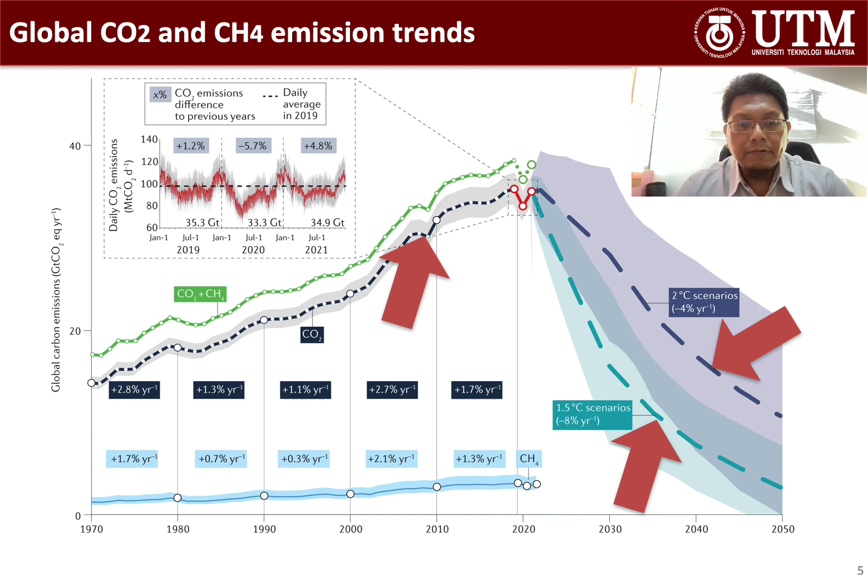This graph is showing the global carbon emissions since 1970 and the expected control level up to 2050. This is the line of the set target for decarbonization until 2050, while this is the line showing the increment of carbon dioxide emissions from 1970 until 2021. This line is for a 2 degrees Celsius global temperature increase. Both lines seem difficult to achieve with current progress.

Since the Paris Agreement in 2015, in order to meet the set target, many automotive industry players started to replace their internal combustion engine powertrains with alternative powertrains, mainly battery electric powertrains. Tremendous effort has been made to increase the global electric vehicle share in the market. In 2022, electric vehicles already covered 13% of global passenger vehicles.

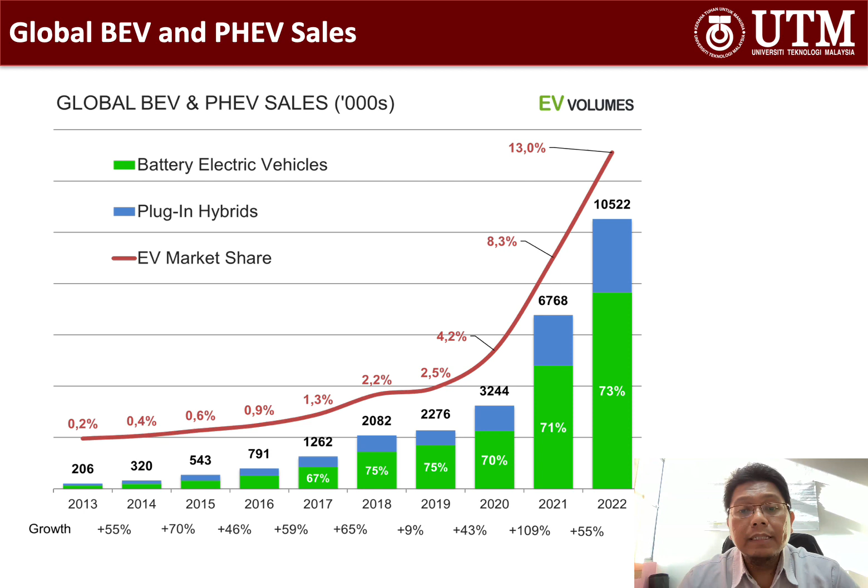However, battery electric vehicles do not always produce zero carbon dioxide emissions. It depends on the source of the electricity supplied to the electric vehicle. If the battery electric vehicle is charged with electricity produced from fully renewable sources, the carbon dioxide emissions from this battery electric vehicle can be zero. Unfortunately, many countries in the world are still heavily dependent on carbon-based fuel to produce electricity.

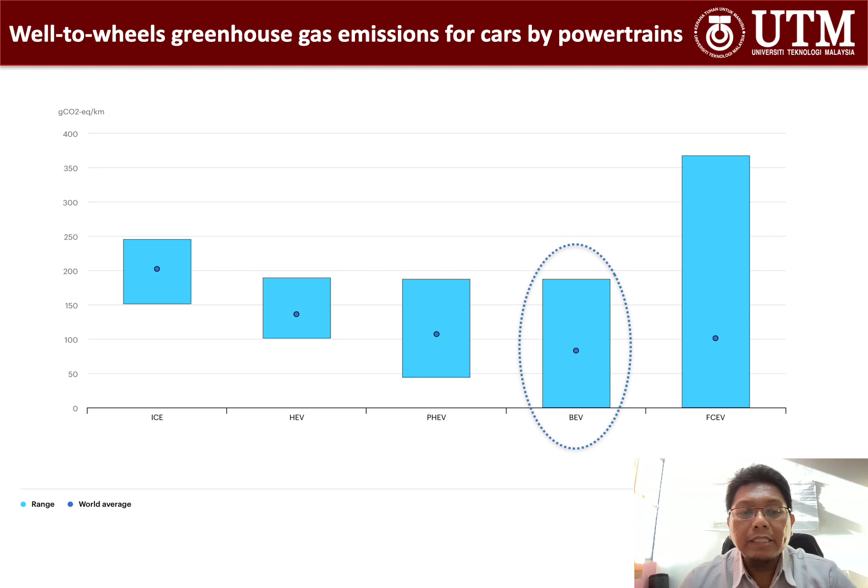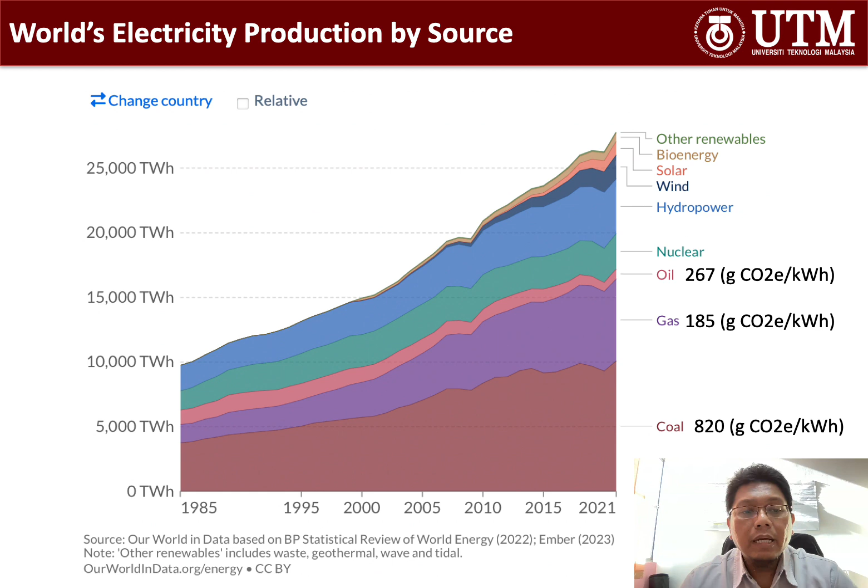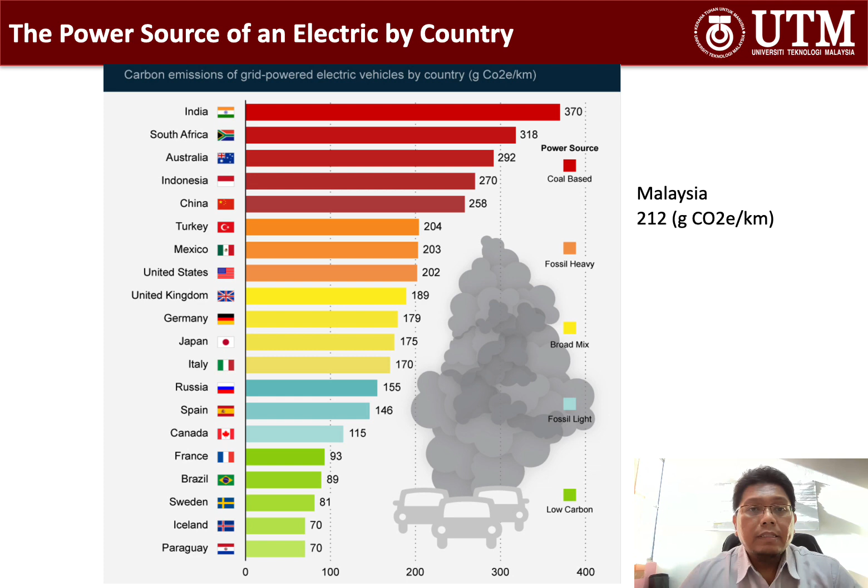As for Malaysia, the average carbon dioxide emissions if I drive a fully electric vehicle here is about 212 grams carbon dioxide equivalent per kilometer. Of course, the type and size of battery electric vehicle will churn out different levels of carbon dioxide emissions.

As an example, if you drive a Tesla Model 3 in Malaysia, you are going to produce a lower level of carbon dioxide emissions as compared to if you are driving a Tesla Model X, which is an SUV. However, we can average it into a single number of carbon dioxide emissions of a medium-sized electric car for the electricity mix of a particular country. For Malaysia, it is about 212.4 gram carbon dioxide equivalent per kilometer.

An interesting point I would like to make here is that a certain small internal combustion engine vehicle can even have lower carbon dioxide emissions as compared with a battery electric vehicle. In general, any petrol-powered vehicle which attains a fuel economy greater than 15.5 km per liter is cleaner than the average electric vehicle operated in Malaysia. Many existing internal combustion engine vehicles and hybrid electric vehicles are capable of routinely exceeding this figure. This happens because the electricity produced in Malaysia is still producing a high level of carbon dioxide emissions.

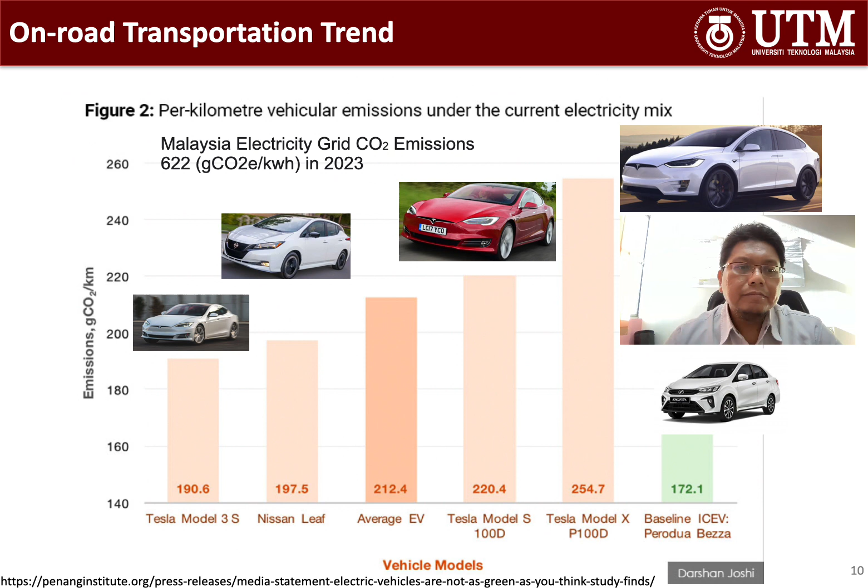Electrification of all passenger vehicles for the whole world will only be able to reduce global greenhouse gas emissions by a maximum of 6.64%, with the assumption that battery electric vehicles emit zero carbon dioxide emissions. Up until 2022, the market share of battery electric vehicles is 13% globally. And as stated earlier, electrical grids are still not up to our expectation. This means that up to year 2022, the carbon dioxide emission reduction from the battery electric vehicle initiative contributes less than 0.8% globally. The progress is too slow to meet the 1.5 degrees Celsius global temperature increase above pre-industrial level. Something has to change in our approach.

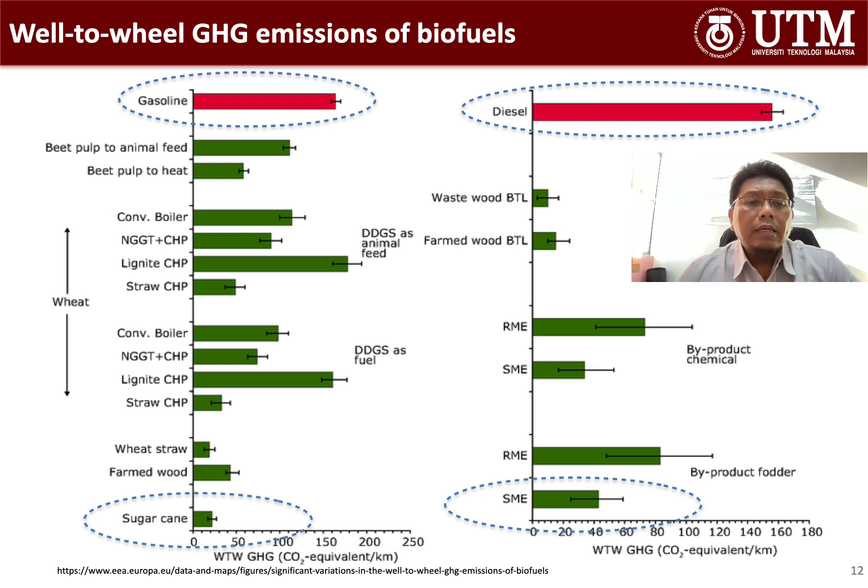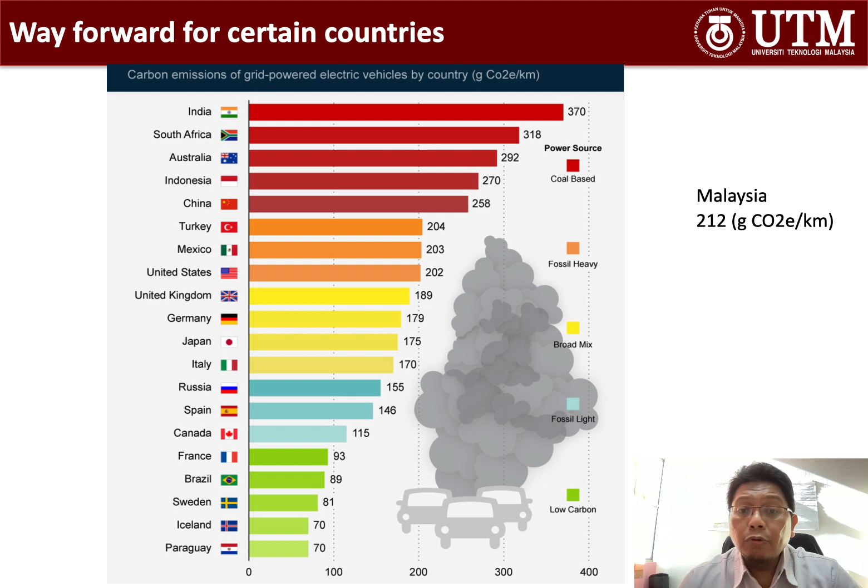We can take Brazil as an example of a country using sugarcane ethanol fuel for 73% of their cars. 92% of all newly sold cars in Brazil use ethanol fuel. The US EPA regarded Brazilian sugarcane ethanol as an advanced biofuel due to the reduction in Brazil's GHG emissions by 61%. Here, would you think Akio Toyoda's point of view is totally wrong? Different countries may require different measures to combat the increase of greenhouse gas emissions. One size doesn't fit all. Based on this chart, Indonesia and Malaysia should not go for battery electric vehicles, at least for now. We should follow Brazil. I will tell you why.

84% of global palm oil production comes from Malaysia and Indonesia. In total, palm oil plantation land covers about 20 million hectares. Palm oil can be used mainly as cooking oil and biodiesel. Previously, biodiesel made from palm oil was exported to European countries, but nowadays they impose sanctions on the palm oil industry with a list of allegations such as deforestation, peat soil usage, endangered animal species, and inappropriate palm oil manufacturing processes. By year 2030, no biodiesel will be exported to European countries and there will be an excessive supply domestically. Indonesia has already imposed 30% palm oil biodiesel content in their diesel fuel, while Malaysia is implementing 20% biodiesel content in our diesel fuel in order to mitigate the excessive supply.

Deforestation due to the plantation of palm oil trees was an action that was done in the past. Let's admit that it was bad. It contributed to higher GHG emissions into our atmosphere. However, we cannot reverse the process. The plantation is already there. What suggestion do European countries have for us in this tropical climate to generate renewable energy? We do not have deserts to install solar panels. If we do want to install solar panels, we still need to use some of our forest land to do it. Therefore, what we can do now is to use whatever is available in our possession, in this case, palm oil, to mitigate the hike of GHG emissions. Malaysia and Indonesia should use more palm oil or other palm-based biomass locally as the main source of our fuel, either for transportation or other energy generation purposes.

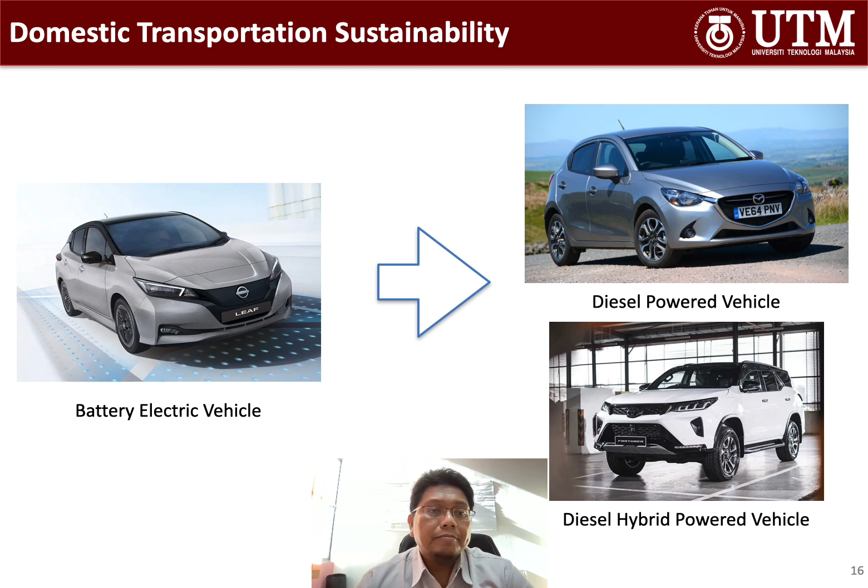Some might be skeptical of the use of diesel vehicles. The general perception is that diesel vehicles produce bad emissions that can affect the environment and human health. Have you seen any new diesel vehicles with black smoke coming out of their exhaust tip? Diesel vehicles have advanced tremendously in the last few years thanks to the Dieselgate tragedy in 2015. Nowadays, soot and NOx emissions can be controlled, as shown in this figure, by using all these available diesel technologies.

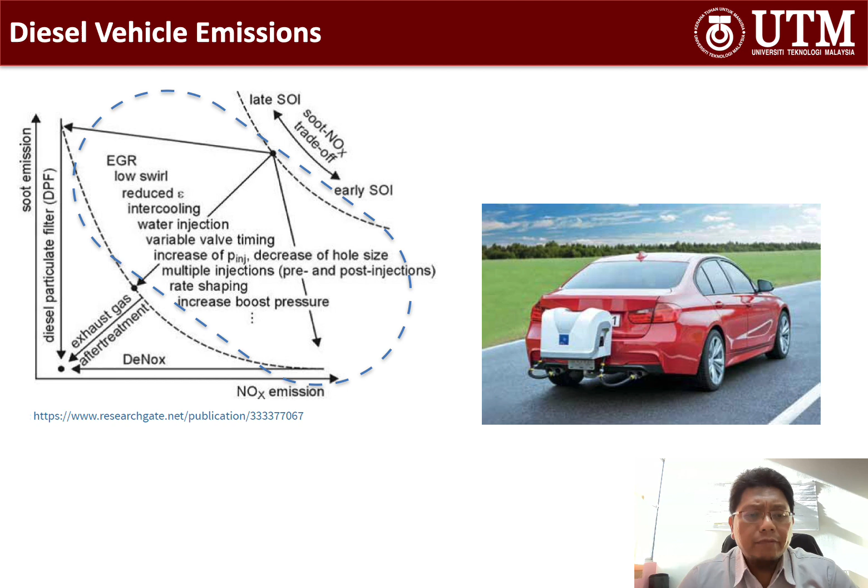Crude palm oil will undergo a very long process before it can be used as biodiesel. This will incur costs to the production of biodiesel. With the current crude palm oil price, 100% palm oil biodiesel will cost double that of conventional diesel fuel sold in Malaysia. That means the higher the percentage of palm biodiesel introduced into the diesel fuel, the higher the cost of producing the blended diesel fuel.

Even though the use of biodiesel might help to reduce GHG emissions, cost effectiveness of the usage must be taken into account to ensure attractiveness and sustainability of using biofuel. One of the methods to use palm oil in a cheaper way is by using crude palm oil without transforming it into biodiesel through the trans-esterification process.

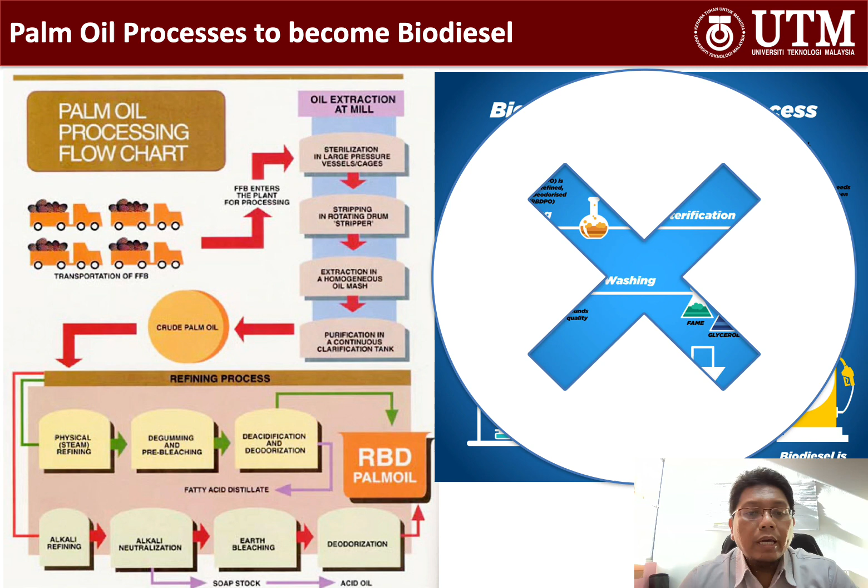Since the most problematic issue with the use of straight vegetable oil is gumming, we can use crude palm oil that has completed the degumming process. No need to bleach and deodorize the fuel. Bleaching is for color and deodorizing is for odor removal. This stage is not really required for fuel usage.

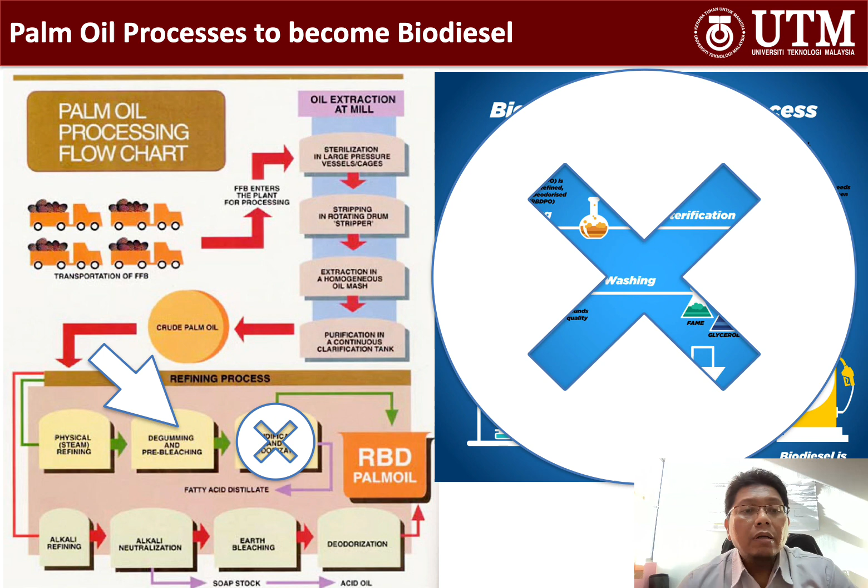What are the problems related to the use of straight vegetable oil as diesel fuel? First, the high viscosity and low volatility of straight vegetable oil can cause incomplete combustion, which will lead to formation of carbon deposits on the fuel injectors, piston, and cylinder head.

Second, the high viscosity can cause premature wear of fuel pumps and injectors, and can also dramatically alter the structure of the fuel spray coming out of the injectors and increase spray penetration. All of these changes to the fuel spray will tend to increase wetting of the engine internal surfaces with fuel, leading to an increased tendency to form carbon deposits and dilute the lubricant.

Generally, diesel engines with vegetable oils offer acceptable engine performance and emissions for short-term operation. However, long-term operation results in operational and durability problems. Some investigators have explored modifying the vehicle to preheat the straight vegetable oil prior to injection into the engine. Others have examined blends of vegetable oil with conventional diesel. These techniques may mitigate the problems to some degree, but not eliminate them entirely. Studies show that carbon buildup continues over time, resulting in higher engine maintenance costs and shorter engine life.

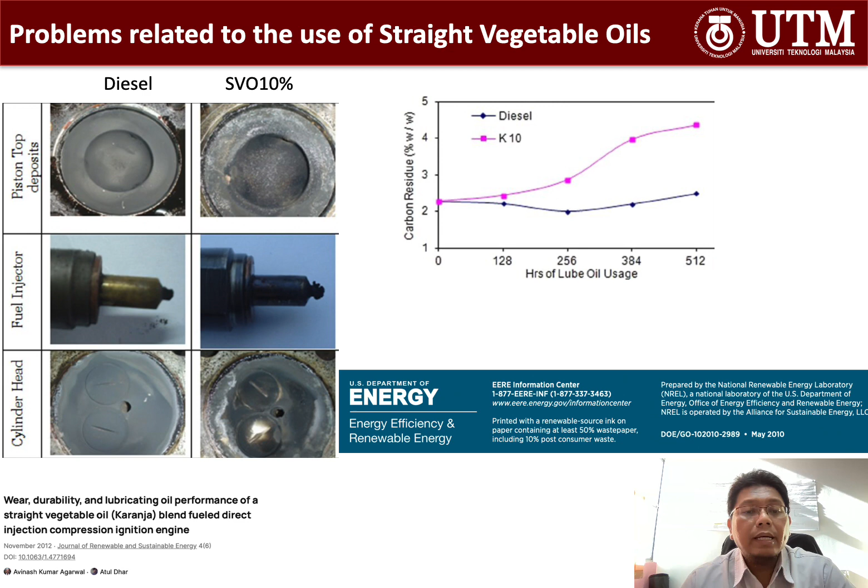In conclusion, if somebody can come up with a method that can reduce carbon deposits and lubrication oil contamination of diesel engines fueled with straight vegetable oil in long duration operation, straight vegetable oil can have a better prospect as an alternative fuel. One of those methods that can be considered is emulsification of straight vegetable oil or crude palm oil.

Emulsification can help improve diesel combustion by a phenomenon known as microexplosion. Microexplosion is a secondary atomization due to the evaporation of water droplets inside the emulsion fuel, which will further reduce the fuel droplet size and improve the atomization process. This is expected to reduce carbon deposits and lubrication deterioration in the long run of diesel engine operation.

A 200-hour durability test using emulsion fuel with 10% and 20% water confirmed the capability of emulsification. However, this study is for conventional diesel emulsion fuel. Crude palm oil emulsion is yet to be tested.

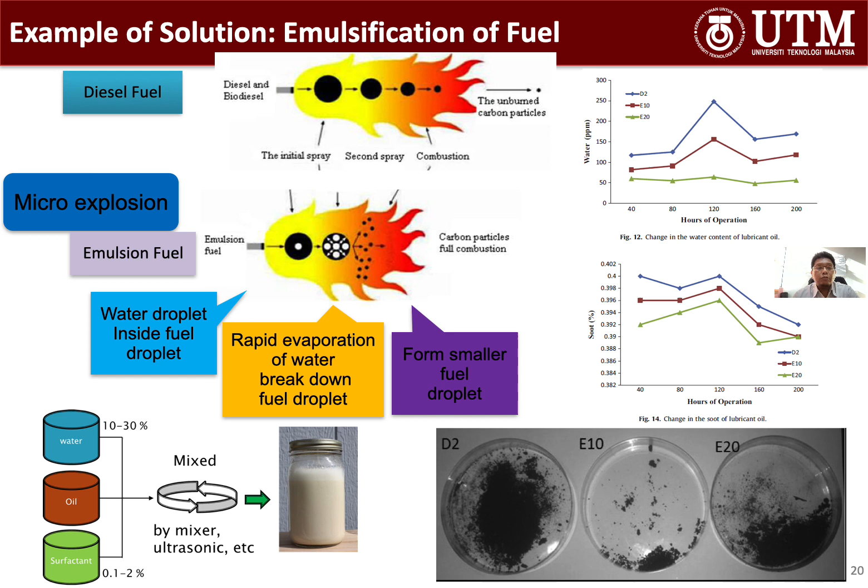An initial test has been conducted to measure the engine performance and emissions of a small diesel engine fueled with crude palm oil emulsion. We took two sets of data for 2900 rpm and 3200 rpm and varied the engine loads from 1 kilowatt to 4 kilowatts. Test fuels are conventional diesel, here stated as ordinary diesel fuel, neat or 100% crude palm oil, and emulsified crude palm oil with water percentages of 5, 10, and 15%.

In terms of fuel consumption, it can be seen that neat crude palm oil is significantly higher than conventional diesel fuel, with a maximum of 17% increment due to its lower calorific value of about 21.3% compared with conventional diesel fuel. However, the emulsified version of crude palm oil improves with the increase of water percentage in the fuel. The level of fuel consumption becomes closer to conventional diesel fuel, especially at higher engine loads.

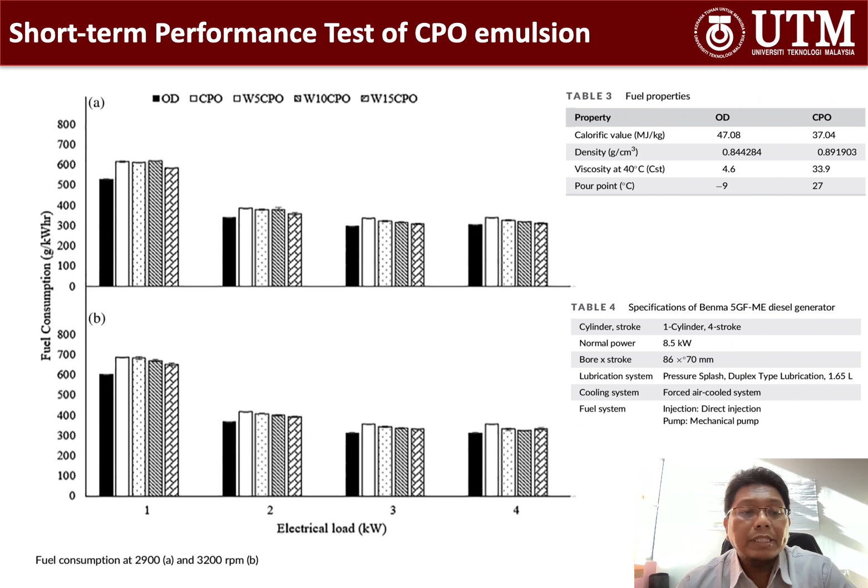NOx emissions for conventional diesel fuel and crude palm oil are at approximately the same level, but for emulsified crude palm oil they are obviously reduced as the water percentage in the emulsion fuel increases. Smoke opacity is significantly higher for crude palm oil compared with conventional diesel fuel. Emulsion fuel with 5 or 10% water has a tendency to lower the gap between those two.

Something should be done to make the smoke opacity of emulsion fuel the same level as or lower than diesel fuel. Among other suggestions are blending the crude palm oil with conventional diesel fuel before emulsification, or introducing hydrogen gas into the emulsified crude palm oil.

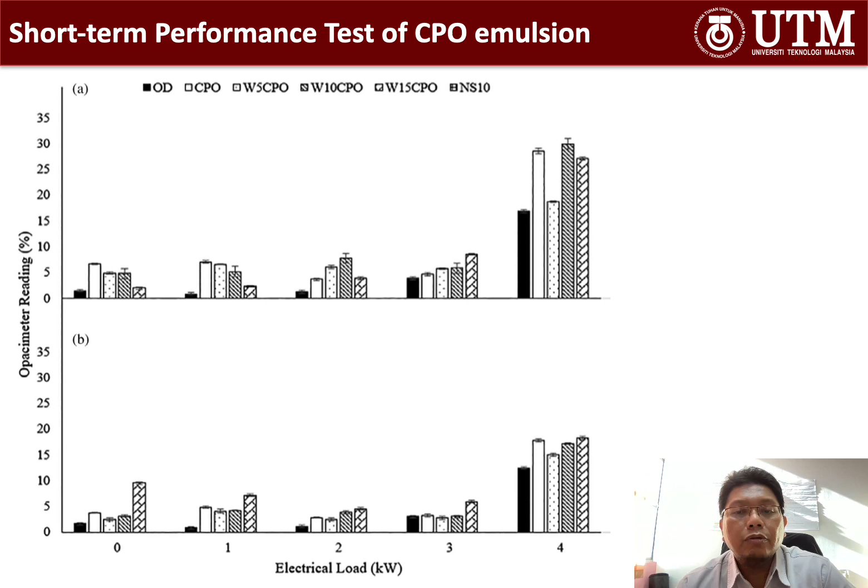In conclusion, something needs to be done so that crude palm oil can be used as diesel fuel at a cheaper price for domestic use. Malaysia and Indonesia should not rely on the electrification solution alone. It will take some time for both countries to have a cleaner electrical power supply, widespread fast charging stations, reasonable electric vehicle retail prices, and solve other issues related to electric vehicles. In the meantime, we should concentrate on reducing GHG emissions as soon as possible using our local energy resources.